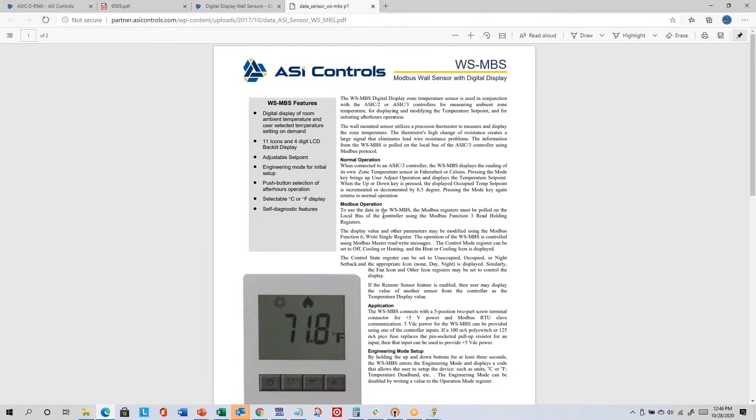So digital display wall sensors, the overview. So both the WS-061, which has a RJ45 connection on the back, and the WS-MBS for Modbus, which has a screw terminal connection on the back, they both look the same from the front, but the connectors are different on the back. And so here's the WS-MBS data sheet, and it kind of shows you here the Modbus registers.

It gets powered by 5-volt DC, and it's got screw terminals on the back, so you need 2 wires for DC power and 2 wires for communication. And so the 9540 actually has a 5-volt DC power supply that can be used to power the sensor. If you use like a 9520, which doesn't have a dedicated 5-volt power supply, here's an example. You can actually use an input to provide 5-volt power to the wall sensor.

You can't use it as an input for another wired sensor, but you can kind of sacrifice that input to use it as a power supply. You would insert the included picofuse in the pull-up resistor slot for whatever input you're using to power the Modbus wall sensor. And so in your virtual training files, I think there's a PDF called APB-WS-MBS, which is the application bulletin for the Modbus wall sensor.

And Modbus is actually one of the original open protocols. It's not as well defined as things like BACnet and LON and other newer protocols, but it still gets used occasionally. It originally started in the industrial world and kind of worked its way into the commercial world a bit. It's still not the most common one, but sometimes there's Modbus gateways to certain kinds of controllers. I know like Carrier used to have a Modbus gateway.

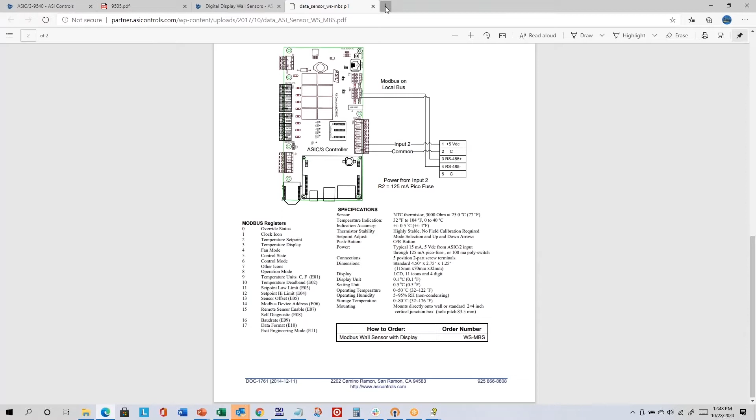But some other Modbus devices that have been connected would be things like certainly our wall sensor. Some people do generator monitoring. There's lighting panels. There's VFDs. There's input and output modules. And so Modbus has just a few different types of objects or registers. And so let me just do a Google search here, Modbus registers. And so this is accurate here. So these are the types.

There's coils, which are binary, normally related to output and can be read-write. There's, this says input bits. I've heard it more commonly referred to as input status, which are binary input values that are read-only. They're not read-write, they're read-only. And then there's input registers, which are still read-only, but they are analog values, typically related to analog input.

And then the last one is holding registers, and those are analog values, but they can be writable. And so everything in our Modbus wall sensor happens to be a holding register. And anytime you're doing any kind of Modbus integration, I would recommend that you get some documentation from whoever's providing the Modbus module that tells you what registers are available and what they do. And so for our Modbus wall sensor, this application bulletin would be the equivalent of that.

Did I open this? Yeah, no, I didn't open it. So this APB-WS-MBS PDF you could open with your PDF viewer. And so there's the wiring. And so this describes the different holding registers that are available.

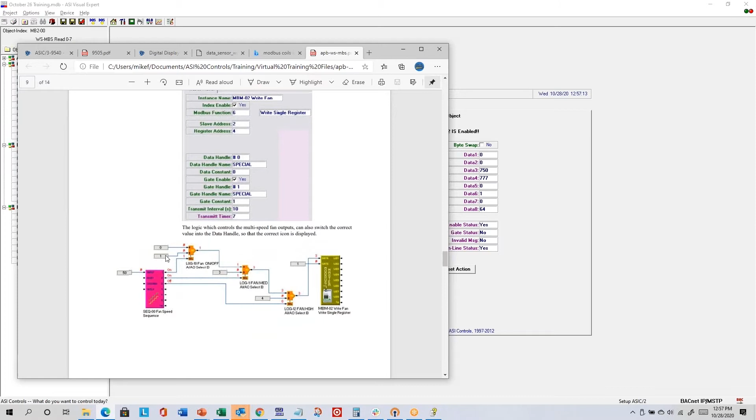I mentioned there's some programming examples. So you might read the holding registers to see if somebody pressed the button. When they press the button, initiate after hours, and then you want to write to that register so that it resets back to 0 so that it can register the next push. Fan mode, if you had a 3-speed fan, then you could select a value between 0 and 4. So 0 means no fan icon, 1 means just the fan icon, 2 means it's the fan icon with 1 bar for low. Then for medium speed, you can show 2 bars, and for high speed, you can show 3 bars.

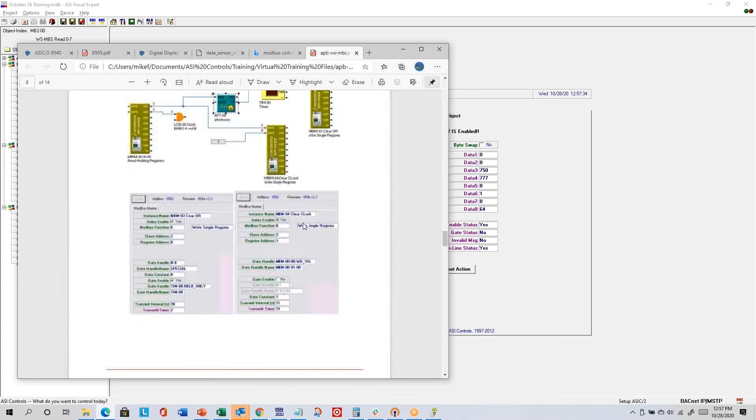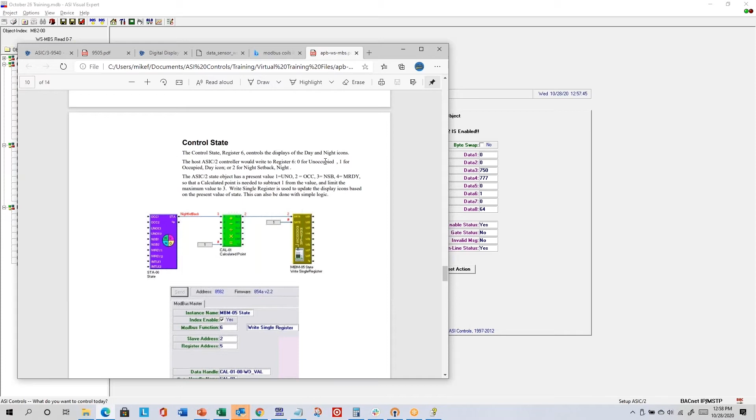Control state: if you're using the state object, you can write a value between 0 and 2, depending on if you want it unoccupied, occupied, or night setback. Control mode: you can write a value between 0 and 2. 0 is deadband, no flame, no snowflake. 1 is cooling, show the snowflake. 2 is heating, means show the flame.

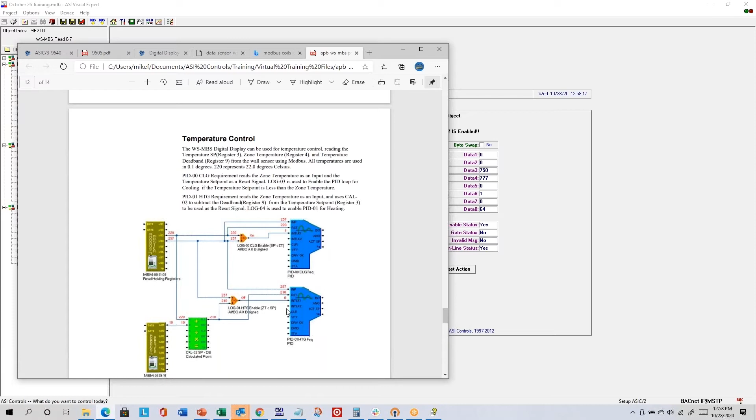For temperature control, you could read the set point from one register, compare it to the temperature in the next register. In this case, we're using them in 2 different PID calculations. There's also this remote sensor mode. So there's a feature called remote sensor enable. If you look in the register list, it's here. So by default, it's disabled, meaning the temperature display is reading the current value from the built-in thermistor.

But if you enable the remote sensor mode, then you can actually write to the temperature display so that you can tell the wall sensor what temperature to show. And so one case of that might be where you have a stainless steel plate sensor in a refrigerated storage area. And on the outside of the refrigerated storage area, you want to just be able to show people what the temperature is in the refrigerated space without them having to go in and read a sensor or take a measurement.

So then you could read that value from that stainless steel plate sensor in the refrigerated space and then write the value to the Modbus wall sensor that's in a more comfortable temperature environment so that somebody could just make sure it's not getting too warm in that space. And so it is important to know that if you're writing the temperature display, you need to write it in tenths of a degree, because the stainless steel plate sensor, we saw temperatures normally read in hundredths. So you can just divide by 10 to get it into tenths of a degree.

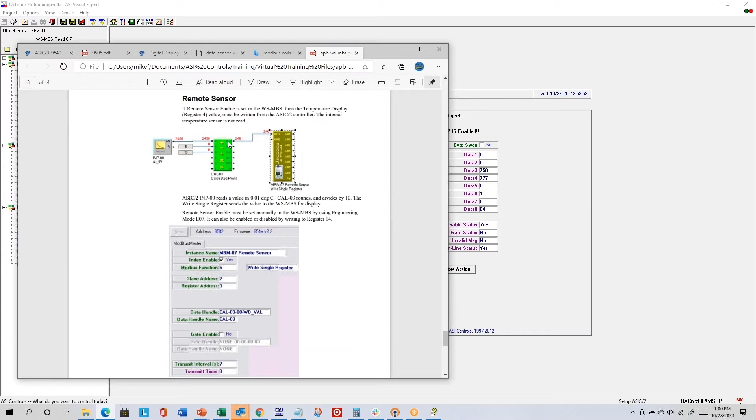And so that's an example of remote sensor enable here. So it's just dividing by 10 and sending out the value in tenths of a degree to the Modbus wall sensor. And so those are some examples. If you ever use a Modbus wall sensor and you have more questions, let us know.

I talked to you on Monday about how to contact us for support. So again, this class is an introduction. We want to show you a lot about the different things you can do with our controllers. So there's a lot of information. Don't expect you to remember it all. So it's important to know how to contact us for support so that you can get the information you need when you're ready. What I usually tell people is, we've been looking through some of the help documentation.

And so contacting us for support is helpful. I do recommend getting familiar with our help documentation. And I'd say take maybe 10 or 15 minutes looking through it. You might find the information you need. You might find some information that you will find useful later when you're working on something else. And if anything, you'll at least get a little more comfortable searching through our help documentation.

If you can't find the answer you need in the first 10 or 15 minutes, that's usually when I suggest you call us, as long as it's during our normal tech support hours. And by the way, I didn't include it here, but Chris Shope, I believe he starts at about 7:30 Eastern time. So then for about the first 6 hours or so, because 10:30 a.m. Pacific would be 1:30 Eastern time, a big chunk of his day is doing tech support for East Coast and Central Time customers.

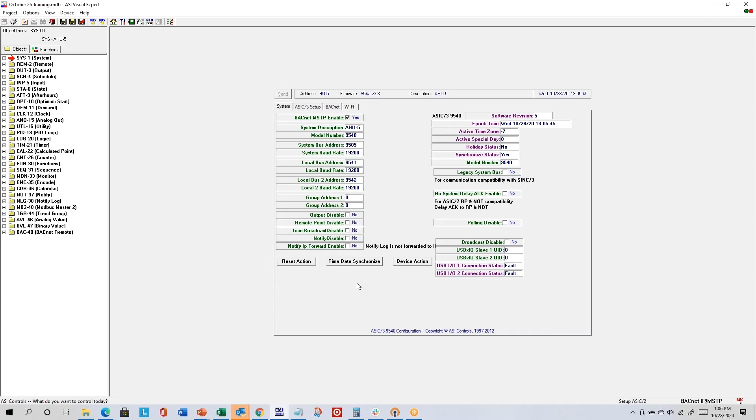Print screen normally prints what's on the right side of the screen. So let me just go back and open my project. October 26th, 9505. So it tends to print what's on the right side of the screen to the default printer within your Windows operating system. So if I click there, I mentioned that I have a PDF printer driver by default. So it's going to ask me to save it as a PDF somewhere.

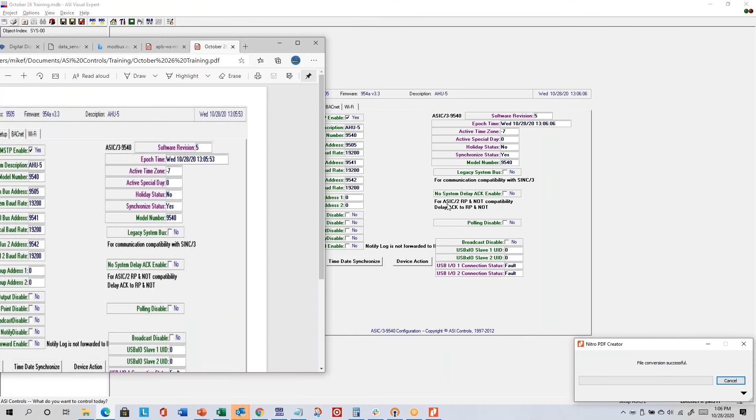Save, creates the PDF. So you can see it's just basically showing what was on the right side of the screen. It'll kind of stretch and skew, so landscape orientation is probably better than portrait, but you get the gist of it.

Project Browser brings you back to the opening screen that you see when you first start ASI Expert. And so this is the folder it's looking in, and these are all the subdirectories it sees with various projects. Most of these other icons are only available while a project is open. So I'll go back to my open project. The telephone icon stores a telephone list, so I don't think you're going to be connecting through many modems.

The binoculars is also for ASI protocol only. You can search for a range of addresses. Since ASI protocol doesn't support discovery the way BACnet does, sometimes you just want to tell ASI Expert to search for a range of addresses. So I'll open an ASI protocol project like my COM port project. Not actually going to search, but if you click on the binoculars icon, you can search for a range of addresses there.

Let me go back to my main project. Project reports, it's kind of a neat feature. I don't think many people use it. It's one of the few ways you can get ASI Expert to show information from multiple controllers. So you can actually create custom reports that look for all your inputs, all your outputs from all of your controllers. You can build your own. If you're ever interested, let me know and I can walk you through it, but I don't think most people use it.

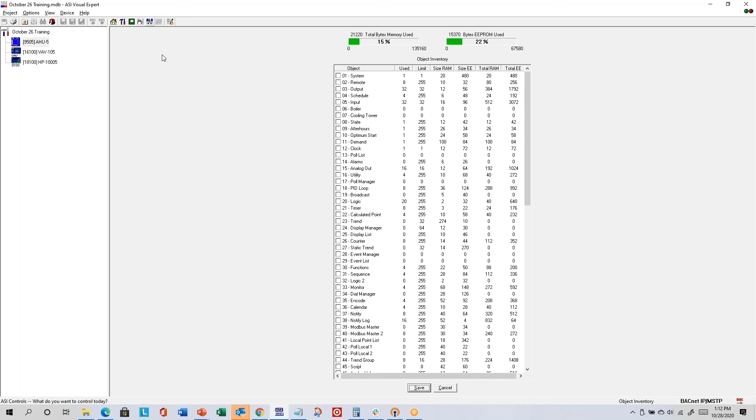Hammer and screwdriver again gets you back to the normal views. Allocation view, we looked at that. That's where you can change the objects that are available for use and how many instances for each object are available. Remember that reallocating or changing the allocation does cause the controller to reset, which turns all the outputs off briefly. So be prepared, or don't do it unless that's something that's safe to do. Hammer and screwdriver for configure device gets us back to normal views.

We've used auto trend. There's this pencil icon to edit layout. You can actually change what's shown on these screens. We don't generally recommend that end customers do it, because when we release a new version of ASI Expert, sometimes we'll change the screens and we don't want to overwrite some screen that you've customized and now it's gone. But let's see, there are a couple of things on my list here. Like I said, on the output setup tab for the PID object, there were some parameters that didn't belong.

So these three parameters shouldn't really be shown here. So once I send that report off, what somebody's going to end up doing is going into the edit layout mode, finding the output setup tab, and then to delete an item, you just click and drag like you're going to reposition, but there's this trash can lower right. So someone's going to do probably something like that.

And then you click save when you're done, and now you won't see those anymore, and they'll build that into the next installation version. You don't need to worry about that now, but just want to show you one thing you could do while editing the layout.

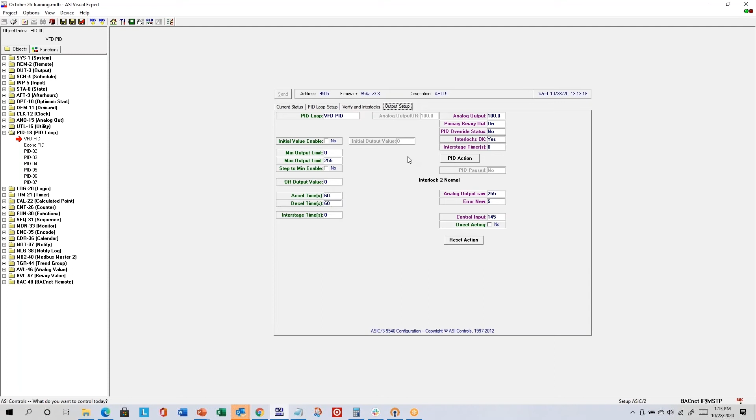So going through the menus, a lot of the menu items have toolbar icon equivalents, but Project New lets you create a new project. I don't usually use that because when I want to create a new project, I usually just start in Project Browser and double click here to create a new project like it tells you to.

Open lets you open a project, and so the files you can expect to see when you're working with ASI Expert, if you start from C:\ASI Controls\Projects and look in a directory, there will be usually one MDB file, which is like a Microsoft Access file. We actually use an older version of the Access MDB format. So be careful if you're ever trying to edit them manually.

But this MDB file doesn't contain a lot of programming information. It, for the most part, just contains the information needed to build the tree on the left. So October 26th training, basically it has the name of the project and the controller model numbers and addresses and descriptions. It doesn't know about how many PID instances there are and what the control set point is and stuff like that.

There will also generally be at least one .asi file for every controller in the tree, and the .asi file is the one that contains the details about the programming in terms of set points, personalities, input, output names, all those sorts of things. Then if you've ever exported any CSV files, they'll be there. If you've created any backup folders or other folders that contain .asi files, they'll be there.

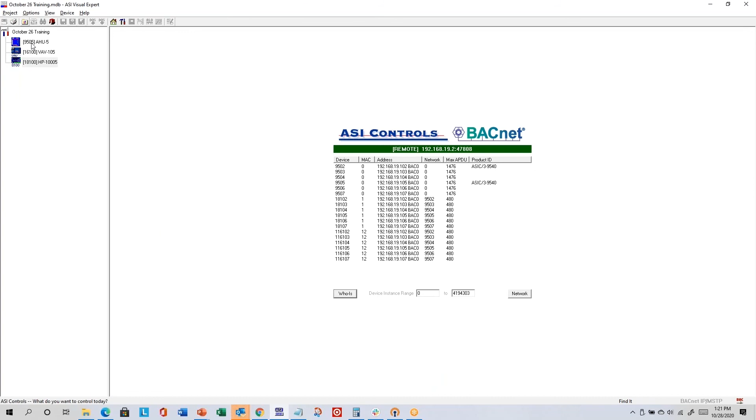That's saying, do you want to save all the latest information used to build the tree, so that when I reopen the project, it contains all the controllers you currently see. If I click no and reopen, I wouldn't see the 9502 controller because it didn't get saved in the MDB. I'll show you that. I click no, I don't want to save it. If I come back to my October 26th project, you can see 9502 wasn't there. So that's why I like autosave. It makes sure you always have the latest programming from the controller stored on your computer, which I think is generally a good idea.

One other setting in here is the function groups print preference: 1, 2, or 4 pages. I'll choose 1 page to start. Notice it says landscape mode for 1 page. When you choose 2, it says portrait mode. When you click 4, it says landscape mode. So I'll click 1, click OK.

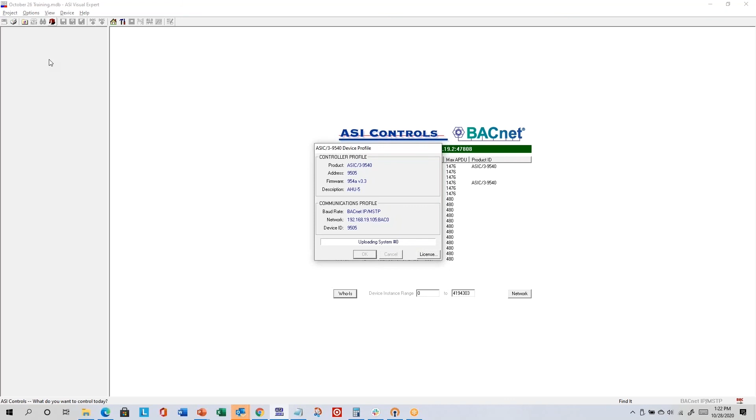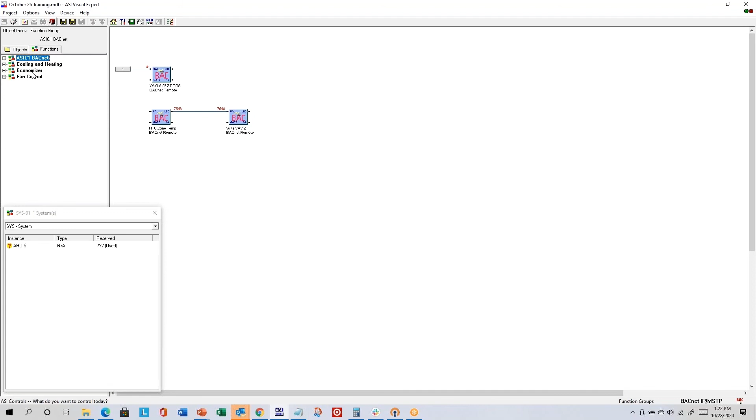I mentioned that when you're talking to your controller and you're in the Functions tab doing your programming, there are horizontal and vertical scroll bars. So one of your options is to print these screens out. If I'm looking at this cooling and heating group and I click the print icon, printing a function group does actually let you choose the printer. Most of the time when you choose the print icon, it automatically goes to the default printer within Windows.

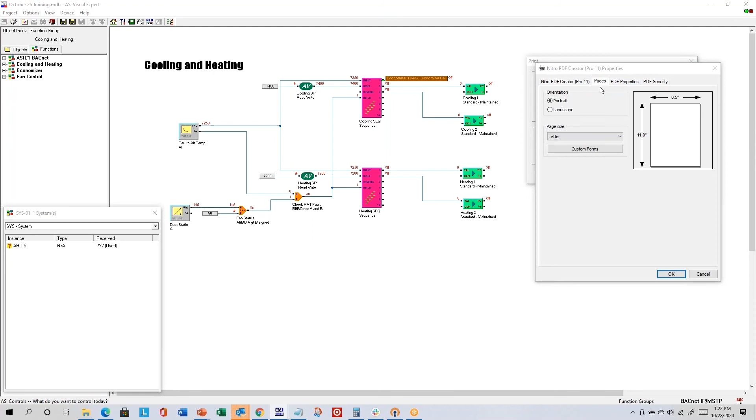But in this case, I'm going to go to this PDF printer driver. I'm going to make sure I'm in landscape mode by going to Properties, Pages, Landscape. And now if I click OK, since it was 1 page, cooling and heating, new.

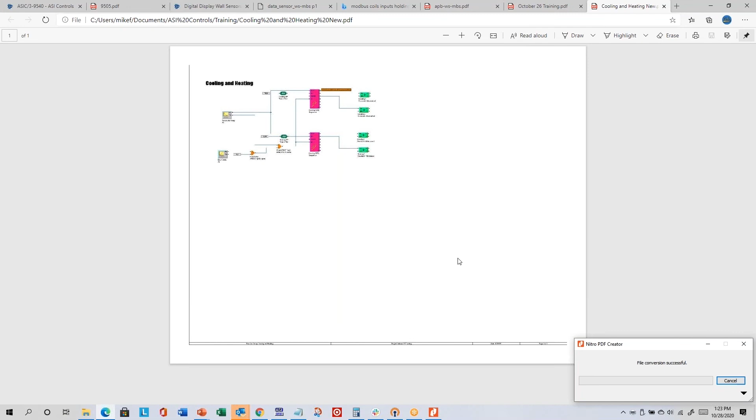And so you can see that printed it all on 1 big page. So that almost requires 11 by 17 minimum in terms of the size of the paper that you're printing on. This wouldn't be real readable on 8.5 by 11 landscape. So if you were to choose a 2-page printout, and I'm just going to do something like this just so I can mark it up.

So if you chose a 2-page printout, then it would break it up into 2 pages, something like vertically, something like this, and like that. And then if you chose the 4-page printout, then it would break it out into 4 quadrants, something like this, and then that, and then that quadrant, and finally that quadrant.

So the 2-page is good for portrait because it does basically a left and a right, and then that works. That's pretty readable on 8.5 by 11. But if you want to make it a little bit bigger, you can choose the 4-page printout, and then it'll print them in 4 quadrants, and that works better in the landscape view. So that is the print preference setting.

That and that, minimize. One other thing, not directly related to toolbars, because I think that's most of what I want to show you from menus and toolbars. But one other thing I want to show you before we end is if you right-click here on the left side, actually before I do that, I'm going to right-click on the right side. If you right-click on the right side while viewing a function group, it gives you an option to save as bitmap.

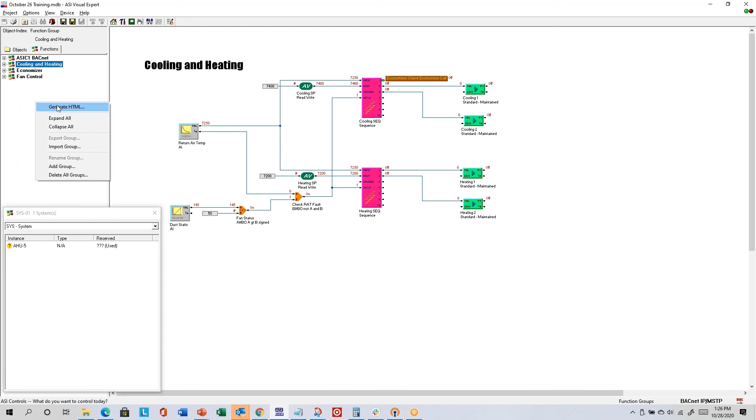I don't usually use the Save as Bitmap option, though, because I think a better way to get pictures is to go to the left side of your screen where the names of your functions are, and then do a right-click Generate HTML. Then it kind of cycles through all of your function groups. And if you go to your project folder, you'll have an HTML folder that has a directory with the ASI address of your controller.

And then there will be an HTML file and a JPEG file for each of your function groups. And then there will be a single index HTML file that you can open with a browser. Then it has the ASI address and the description, some information from your license, a date, and then there's these links to the JPEG files for each of the projects that you have. So you can click to see that one, go back to the index, cooling, heating, back to the index.

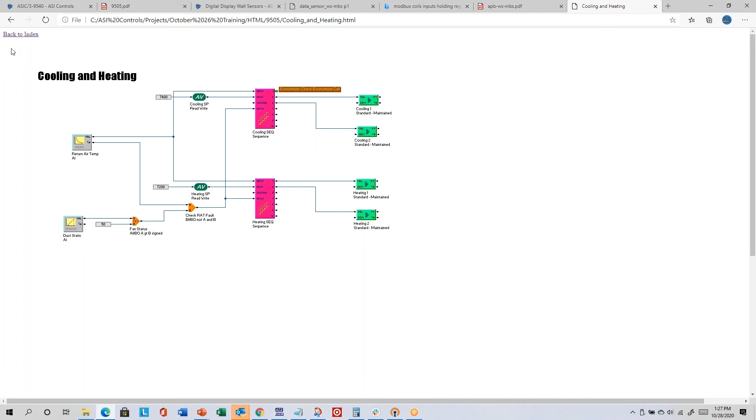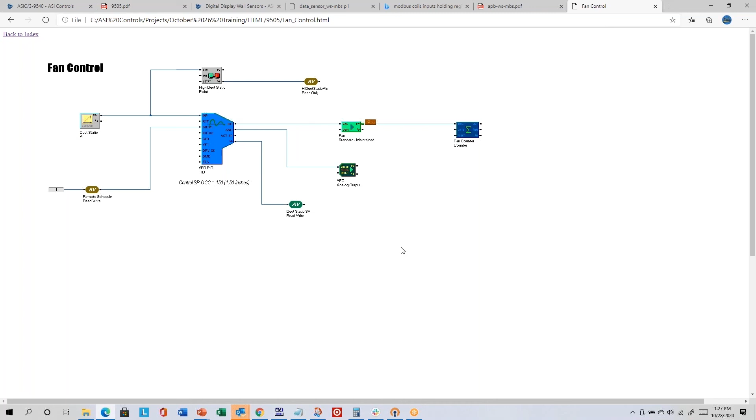So this is another way that you can create images of your programs to maybe share with somebody else that doesn't have ASI Expert. So that's a pretty easy thing to do that you can also include on an electronic O&M manual. Let's see, what else is here?

There's also some options when you're right-clicking on the right. Show tips gives you a little bit more information about each icon and what handles are connected. I don't usually turn that on, and when show tips is turned on, you can't make new handle connections. But you may find that useful if you're not sure where all these various points are connected to. Show types has to do with the second line of text below the icon, which I like to see. But if you turn show types off, that goes away. I like show types on.

Show bold text. If you have a very high resolution display, show bold text kind of changes the text for those below the icons. I don't care for that font, and I don't have a big high-res screen, so I don't usually show bold text.

Show opaque text, where opaque is the opposite of transparent. It really only matters if you have like two items overlapping. So when I'm not showing opaque text and I overlap things, my text has kind of a transparent background. If I show opaque text, then my text has a non-transparent, in this case, white background. So I just try not to overlap things, and then the opaque setting doesn't really matter.

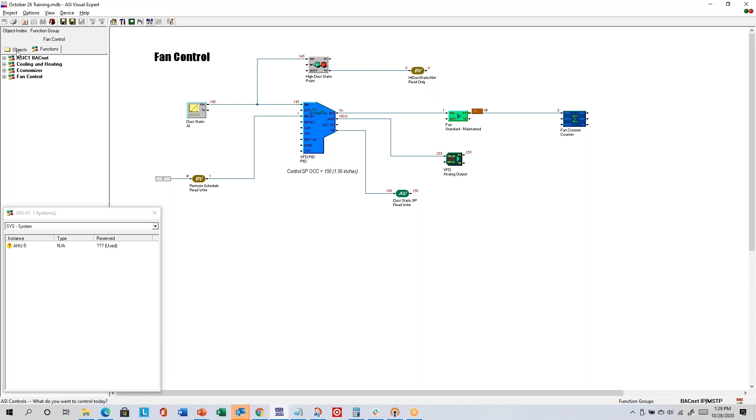We looked at Save as Bitmap, and so we're getting right close to 1:30. I think the last thing I'll show you, if you just go to the Objects tab, there's this BACnet remote object, which from the object overview, I described as a way to share data with other BACnet controllers. And so there were some pre-programmed into these controllers.

So this first one called VAV Zone Temp is reading the temperature from the VAV controller. So on the Read Property tab, I can see that index enable is yes. The interval is 5 seconds, meaning it's reading every 5 seconds. The remote device is the BACnet address of the controller I'm reading from, 116.105.

And on the BACnet remote tab, I have the option to choose a read on interval, or alternatively, I can choose write options if I want to write to the controller instead of reading. The remote object means what BACnet object am I reading from, analog input. Remote instance means what instance of the analog input, in this case, am I reading from analog input instance 0.

I mentioned that BACnet has various properties where present value is usually what you're interested in. So in this case, I'm reading the present value property from analog input instance 0. And so you can see it's reading every 5 seconds. The remote value has a decimal in the right place. It does convert it to a local value without a decimal if you need to use that in programming.

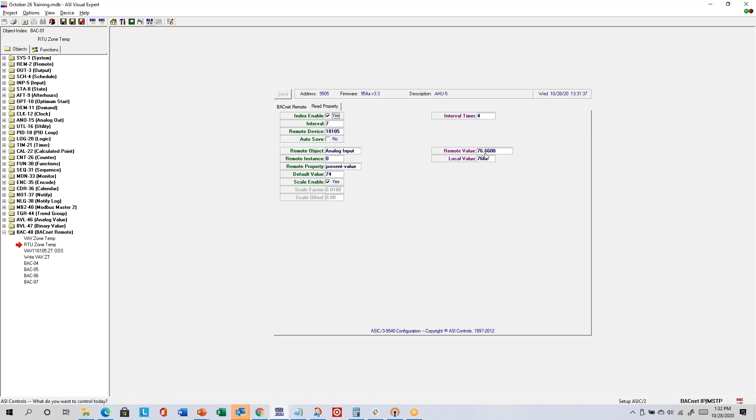So the RTU zone temp read is similar. The remote device is different though, because that's the BACnet device address for the 8100 controller as opposed to the 6100. I'm also applying scaling here so that it divides it by 0.01 so that I can see the decimal value. So the local value is essentially in hundredths of a degree here.

And then the next one you probably won't need to use often, but this is a write. And if you go to the write property tab, we're actually writing a value of 1 to analog input instance 0, but in this case, we're writing to the out of service property. And that basically means take the analog input out of service to overwrite it so that I can then send a value to the present value property.

So in our controllers, and I think this is typical for most BACnet controllers, you have to take the input out of service before you can overwrite it. So this one's just writing every 29 seconds. It's saying, hey, go write, take the analog input 0 out of service, because this next BACnet remote instance, write

VAV zone temp, every 11 seconds, it's writing to the analog input 0 present value, and it's looking at the value from the RTU zone temp reading, and then it's also applying scaling of 0.01 so that I get the decimal in the right place. So it's reading 7671 from the RTU zone temp, and then it's formatting it in a decimal format because that's the way that it needs to be written in BACnet.